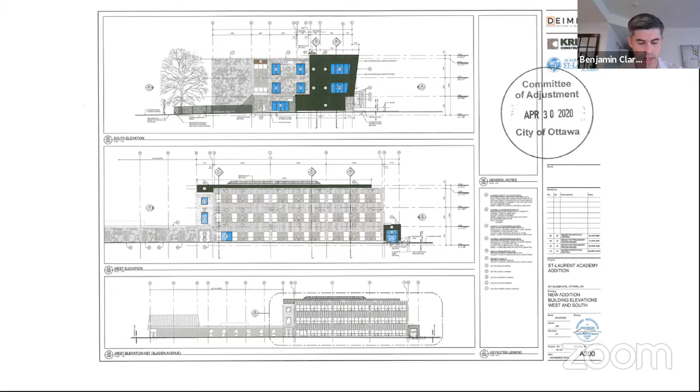In terms of the variances, I've grouped them into two categories. Variances A, D, and E relate to the existing parking configuration and are triggered by way of site plan. In order to obtain site plan approvals, we need these variances. For some time, the school has relied on 640 Noranda Avenue to fulfill parking demands.

640 Noranda is very close. You can see on the plan it is to the southwest, and Forbes Park lies in between. Who owns the parking lot, just out of curiosity? The parking lot is owned by a numbered company, and the director of the school is a director of that numbered company, so it's jointly owned with the school at a high level.

Variance A will permit this required parking for 641 Sladen to be located off-site. It's required in order to legalize that relationship.

The next variance is D and E. So following severance approvals in 2011, which separated 641 Sladen from 638 Center Street, which is on the screen, is the blank property and behind to the east.

The front yard parking configuration of 641 Sladen was reworked, and that happened in the summer of 2012, so about 8 years ago. Is that done with permit?

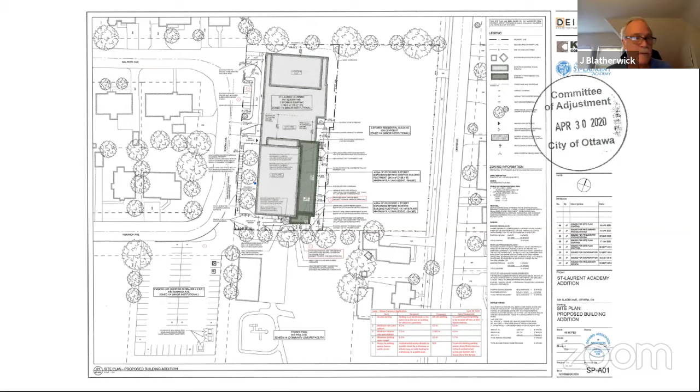Has that been successfully concluded? No, rights of way preferred that site plan approvals advance and that the variances are obtained, and that agreement would form part of site plan approvals.

I state within the plan that these three variances meet the four tests as part of the minor variance approvals. A note, I'm not clear on the address for 640 Noranda.

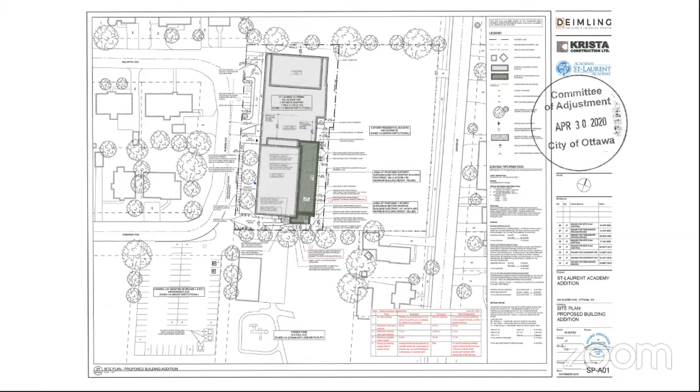In some instances, it's referred to as 640 Sladen. You're losing your audio, sir. Are you able to hear me now? That's a little better, yeah.

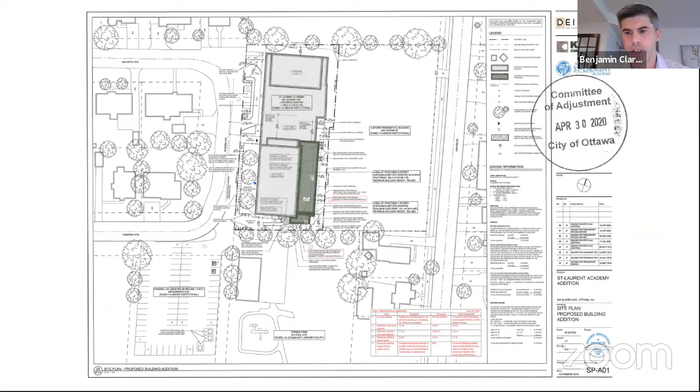So just mentioning that I'm not perfectly clear on the address for 640 Noranda. In some instances, it's referred to as 640 Sladen. So I would just ask that in the decision, if staff is able to confirm the legal or the municipal address. I believe it's 640 Noranda, but that should be clarified.

With respect to the proposed expansion, there are two variances that actually deal with the expansion, B and C. At a very high level, variance B seeks relief from the required rear yard setback of 4.5 meters. This variance represents relief of 0.3 meters, so about 1 foot.

I understand from the project architects that this variance is being pursued in order to ensure that the proposed pool will actually have a functional width. When compared with the requirements of the zoning bylaw, the 1 foot variance is not expected to introduce measurable impact on the lands to the east, upon which 638 Center, a retirement residence, is presently being constructed.

Variance C, which seeks 4.6 meters of relief from the required interior side yard setback of 7.5 meters, is to permit a relatively small 44 square meter, 1-story vestibule, an entrance vestibule within the side yard. Especially when considering the mass of the school behind the vestibule, it's not anticipated that this change is going to cause undue adverse impact. Through the site plan process, the interior side yard is being made functional from a design standpoint and a civil engineering standpoint.

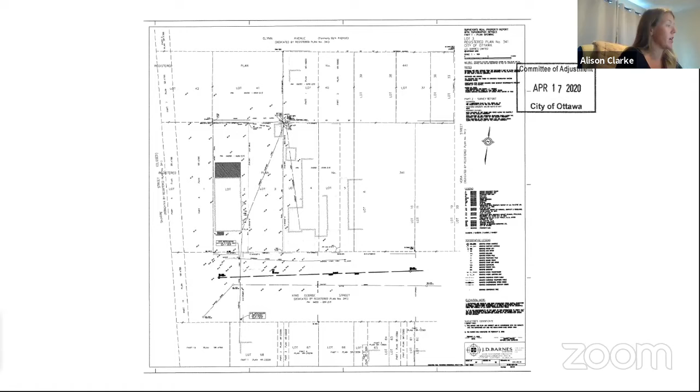We would echo the comments provided to us from the planning department in support of this application. The lot fabric of the street is comprised of single and semi-detached dwellings. Several single detached dwellings on the street are of similar lot width and area as to that we are proposing at 71 King George. Although the zoning bylaw requires a front yard setback of 6 meters, the setbacks of the dwellings abutting 71 King George, both beside and across the street, are less than 6 meters as well. You'll see from the plans that we're proposing just less than 4 meters.

Despite the reduced rear yard setback we are requesting, the proposal will provide the required rear area, thus providing an adequate yard. Similarly, the reduced side yard setback will cause minimal impact, given that the side yard will maintain its functionality, and the easterly side yard will provide access to the rear yard for maintenance. Again, many homes on the street, both beside us and across, provide a similar side yard to that which we are proposing. In summary, the proposal meets the intent of the R3M zone today and matches the fabric of the street. We welcome any questions that you may have.

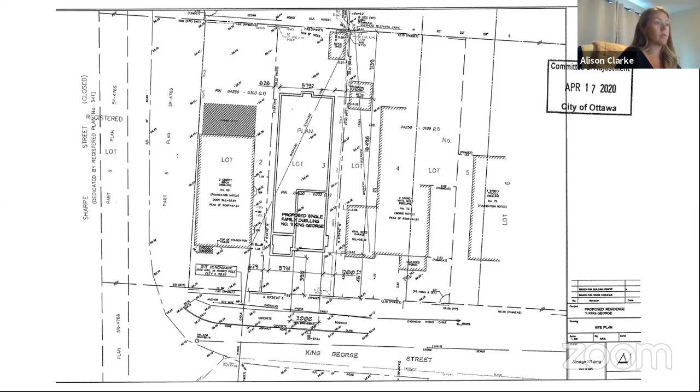Mr. Wilder, you have a question.

I appreciate that these are very small, deep lots on the street. Can you refresh my memory on the history of this lot - was it demolished, or was it actually attached to the adjacent property and severed? That's my first question. Secondly, your request to build to 8.5 meters rather than 8 meters, I don't really see a need for that. You can certainly dig a slightly deeper foundation. I've looked at the other homes on the street, and I don't see any need for variance C.

With regards to the history of the lot, when we received this project from the owners of the property, we were made aware that it was a vacant lot. It has been a lot on this plan 341 for a number of years. There is no severance application that we could find.

With regards to your question about height, the latest elevations provided to committee members show the height is 7.6 meters right now to the midpoint of the roof. This request for height was done out of an abundance of caution. We've gone down this road before where, by the time we get to building permit stage, depending on the grade of the land, the height ends up being a little bit higher, and in the past we've had to come back for a 0.1 meter height request. I agree we are at 7.6 meters and the bylaw allows 8. I'm sure we will be under it, it's just because we had a bad situation in the past.

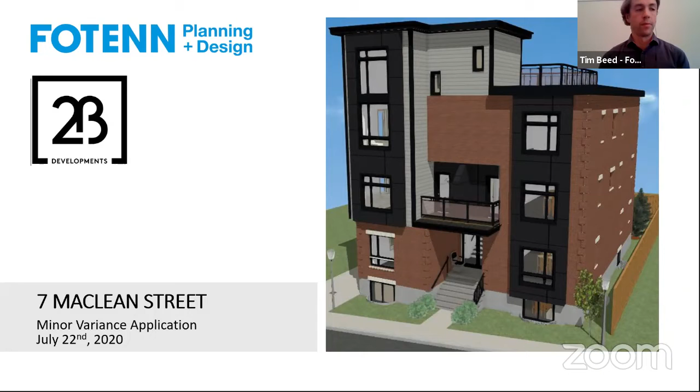The subject property is an interior lot consisting of 386 square meters, with 15.6 meters of frontage along Maclean, and a lot depth of 24.7 meters. It is currently occupied by a single detached dwelling and an accessory building, which is proposed to be demolished.

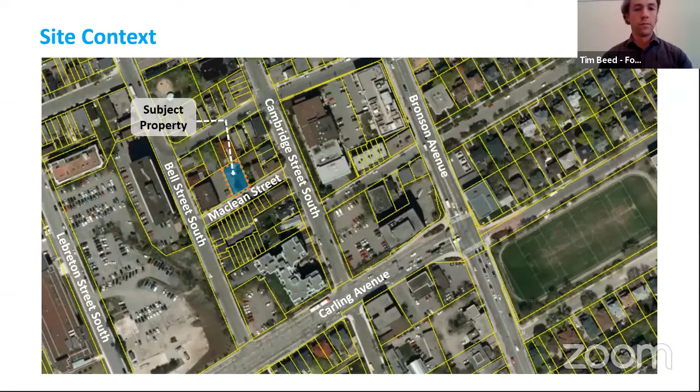The zoning on the site is R4T, subzone T, in the Ottawa zoning bylaw. The intent of the residential fourth density zone is to accommodate predominantly low-rise residential built form, such as this proposal, with a maximum height generally up to 4 stories in the general urban area.

The subject property is within the general urban area on the official plan, and similar to the R4T zone, the city permits and encourages a wide range of choices of building typologies and a maximum of 4 stories.

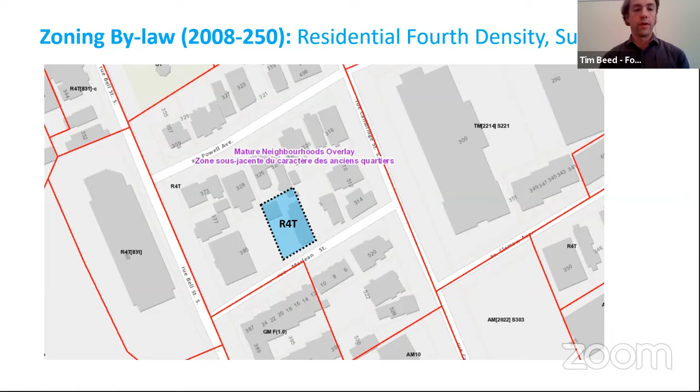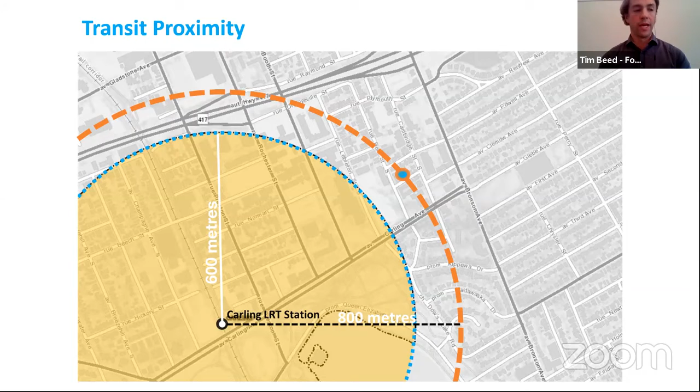The subject property is currently well served by various mobility and transportation options. It's within 800 meters of the Carling LRT station, which will be part of the Phase 2 Trillium Line extension, and is also well served by existing car share options within close proximity in the community.

The community context in terms of uses and built form is quite variable. The subject property is noted on this aerial image as number 1. Numbers up to 7, with the blue outlines, indicate the various residential and institutional built forms within the immediate context, ranging in heights and massing from 3 to 7 stories, with 3 and 4 story multi-unit apartment buildings located along Maclean, directly west, and also close by at the end of the street in a 4-story multi-unit building. There are also multiple parks, community amenities, employment opportunities, and spaces within the immediate context of the community.

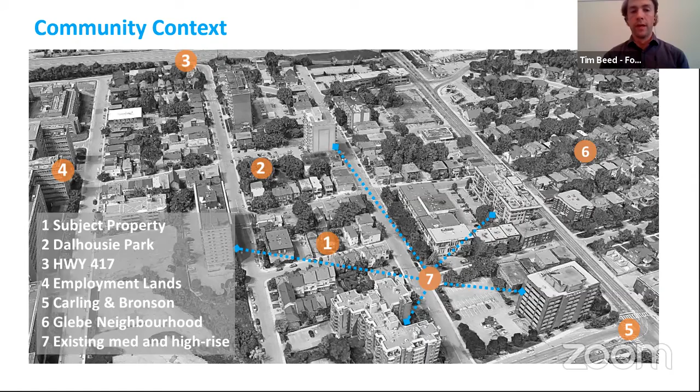The character of the street is currently quite variable. The subject property is currently a 2-story single detached home with driveway and parking accessed from Maclean Street. Directly west is the 4-story multi-unit referenced previously. The portion of that property to the west that abuts the subject property is a surface parking lot; you can see the brick wall that indicates the parking lot and screening to the subject property.

Along Maclean and in close proximity are various 3-story townhouse buildings, with varied and different types of front yard and parking accesses.

This slide better illustrates the existing condition to the west with the surface parking lot, and the existing condition to the east with a fairly large landscaped buffer between the subject property and its immediate neighbor.

Next slide, please. And again, this is to illustrate the varied built form within the area.

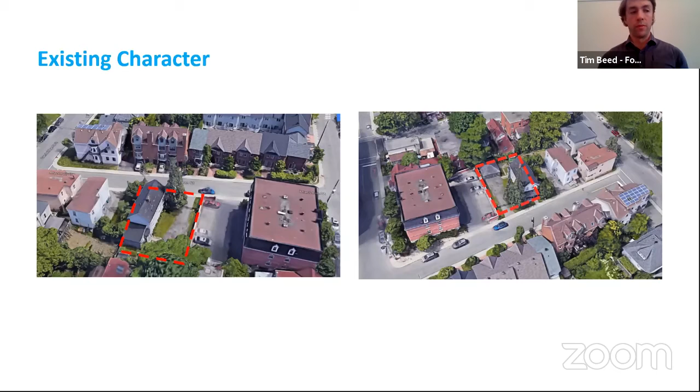So the proposed development is a 4-story building—3-story with an atrium and rooftop access point. We're classifying it as 4-story, 13.2 meter building with 7 units, building footprint of 161 square meters. It contains a mix of bachelor, 2 and 3 bedroom units, and has been designed specifically to respect and complement the community, reflect the lot fabric and surrounding area, and respect the lot area and size.

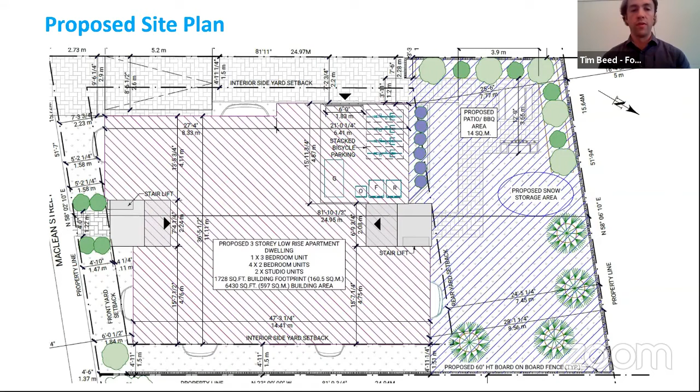Aside from the building height which measures at 13.2 meters, aside from the rooftop access, which we can see on the next slide—the building, for the majority of the built form, massing measures at 10.6 meters, which is significantly below the permitted maximum height within this zone of 14 meters.

Other than that, all zoning provisions, aside from the two that have been requested, have been adhered to, including height, setbacks, side property lines from the roof structure to the building face, landscaped area, amenity area, bicycle parking. They're all met or exceeded.

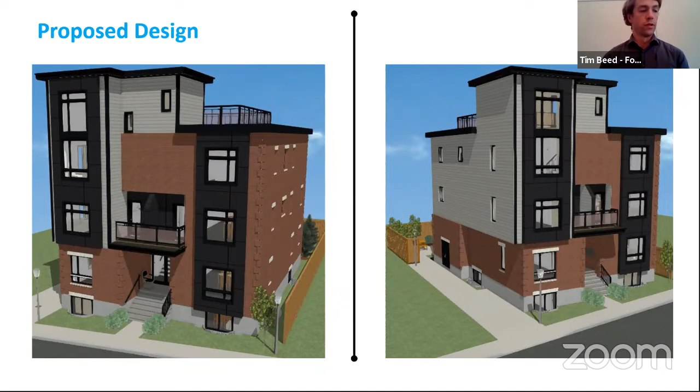And the building also provides a substantial communal rear yard amenity space. We can go to the next slide—you can see here, 14 square meters with patio, barbecue, substantial landscaping, which was a direct outcome of communication with residents and nearby neighbors to provide more of a privacy screen from the rear yard area.

In terms of facade and materiality, the choices include brick, masonry, dark paneling on the front facade, a selection of cladding and colors to provide visual amenity as well as respect to the existing materiality within the community and the character. You can see here there's an access door along the western side, which provides access to enclosed bicycle parking, of which 6 have been provided, as well as garbage, refuse, and collection.

Any vehicle parking on the site? There's one vehicle parking, a visitor parking space provided in the location of the existing driveway and vehicle parking area. It's in the interior side yard to the west. You can see it on this rendering—it's slightly extended and leads into the walkway that goes back to the garbage enclosure and bicycle parking.

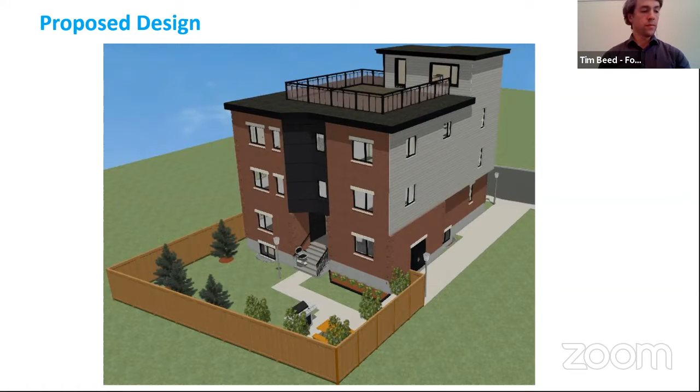Right. Moving on to the next slide. So the last item that I'll discuss, and then we can just quickly go through the remaining elevations.

The rooftop patio is accessed from the 4th story portion of the building, which is in a sense more of a mezzanine, providing access to the rooftop patio, which adheres to the zoning bylaw provisions in terms of setback and screening from the building edge and therefore the surrounding community, ensuring adequate distancing there.

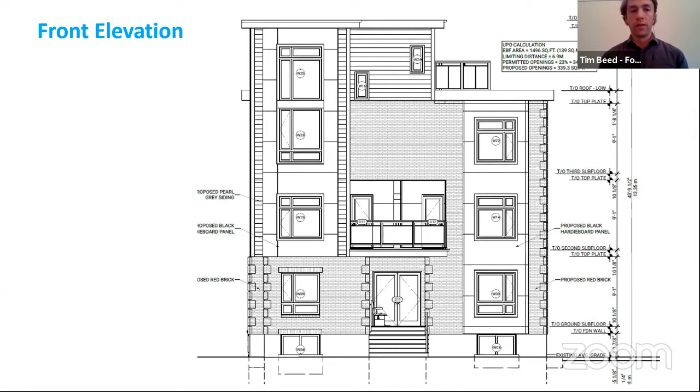We'll just go through the elevations, so if you don't mind, showcasing the materiality and the building step back in height from 13 to 10.6. The building also, as you can see on the front and rear entrance, has lifts for accessibility features. It has fenestration window patterns that provide eyes on the street and a positive interface with MacLean.

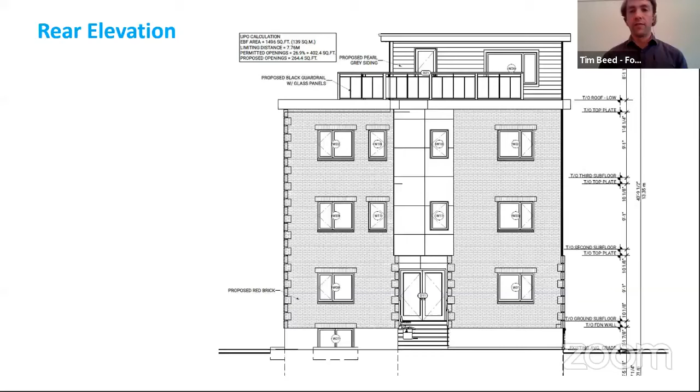Go to the next slide, please. And here's the west side elevation as well, showcasing the access door at ground level to the bicycle parking and garbage collection and storage.

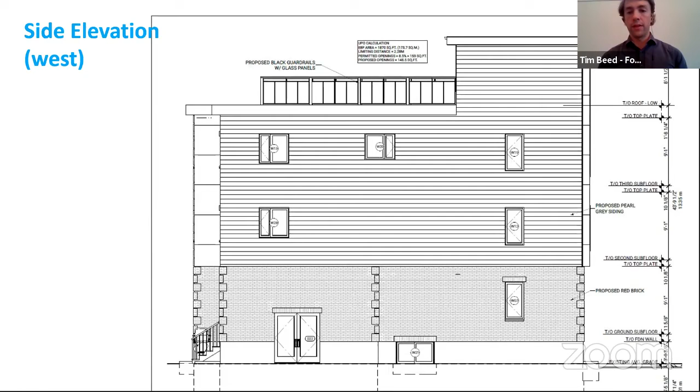Next slide, please. This is the rooftop plan with access to the rooftop patio, which I should mention will be provided solely for the residents of the 3rd floor. It will not be communal space, but accessed only by those residents in the top floor unit.

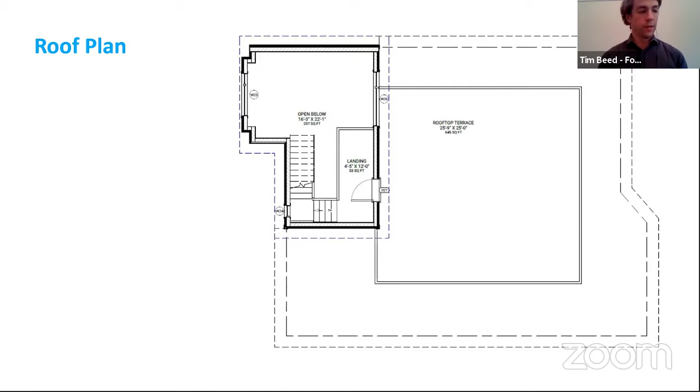Next slide, please. So I'll just go over quickly how the proposal adheres to the 4 tests of the minor variance. The general intent and purpose of the official plan is maintained. The proposed development conforms to the official plan policies, including policies which permit low-rise development up to 4 stories. It's an infill and compact development that's respectful of the community character and provides transitions to the immediately abutting residential properties. It also adheres to the urban design and compatibility criteria of sections 2.5.1 and 4.11.

Including massing and height, it's considered appropriate and compatible given the size of the site, the existing built form within the immediate area, and the design. The general intent of the zoning bylaw is also maintained. As mentioned, regarding the size of the building footprint on the lot, although a minor variance is required for decrease in minimum lot size and increase in walkway, the building is still able to maintain 57% lot area for landscaping, a larger than required rear yard at 125.5 square meters, and exceeds all building setback and amenity area requirements.

The building height, as mentioned, is significantly lower than for the majority of the building, especially on those sensitive interfaces to the rear and eastern side yard, significantly lower than required or permitted, providing for adequate transition and mitigating any possible negative impacts that may occur from shadowing, noise, or overlook.

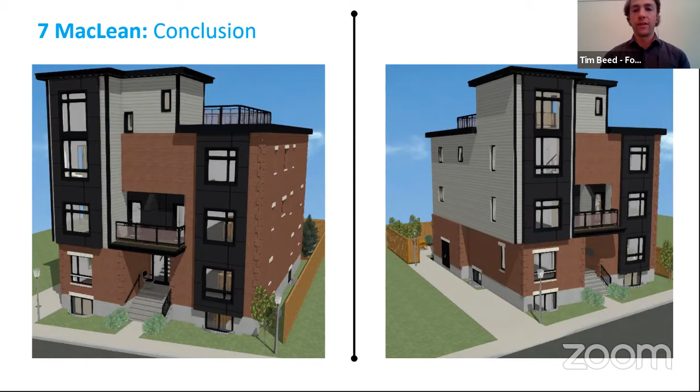The building has been designed to respect the lot size, specifically designed. In terms of the walkway width, the purpose of the provision is to minimize the amount of hard landscaping. This street has very variable front yard conditions with significant hard landscaping, significant walkways, and parking in areas, so we don't believe the minor increase in walkway width will have any negative effect on the character. The variance is minor, a 14% reduction in lot size.

It will likely not be noticeable in the building, as we've mentioned, and can still provide the required amenity space and landscaping area, mitigating any undue adverse impacts on the community or the residents.

The variance is desirable for the appropriate development of the property. It provides additional housing opportunities within the community. It's well designed, low rise, respectful and complementary design that is in keeping with the existing character and the future and planned function of the area. It's also considered an important investment as Ottawa intensifies, especially in close proximity to LRT, in something often referenced as the missing middle — low-rise, walk-up style residential multi-units that can provide for a gentle or more modest density increase within our established communities.

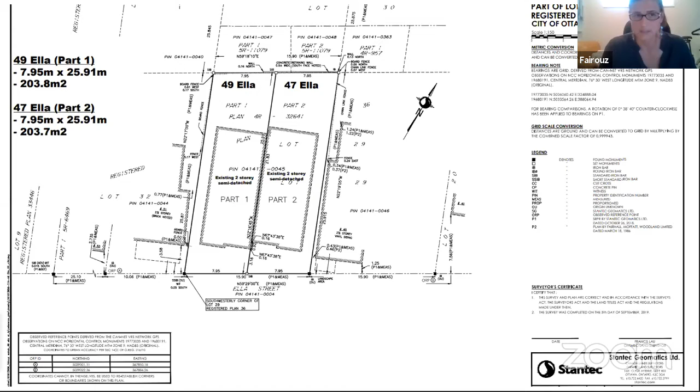Would you have an elevation of that front elevation? I do not have that with me, no, but I can take a photo and send it. Well, I think I'll accept your assurances that there's no structure underneath or above. Okay, thank you. No problem.

You're aware of the conditions, at the independent services and the zoning? Yes, I am. Frankly, I don't know why the department is asking for a noise study to be registered on title, perhaps they could respond, I'm a little confused. Mr. Chair, I believe it's not a noise study but a noise agreement, because the house is approximately 30 meters from Fifth Avenue, which is a collector road. So what is a noise agreement on title? Yes, effectively it's to warn future purchasers that there could be higher than normal noise due to the collector road at Fifth Avenue. Yeah, certainly not getting higher than normal noise on Ella Street, I'm familiar with Ella Street.

Okay, thanks very much. Are we all in favor of this consent as explained by the owner? Good luck, and I hope the bricks don't fall off your garage, you don't have to go back again. Thank you, I appreciate that. Thank you very much. You're welcome. Bye-bye.

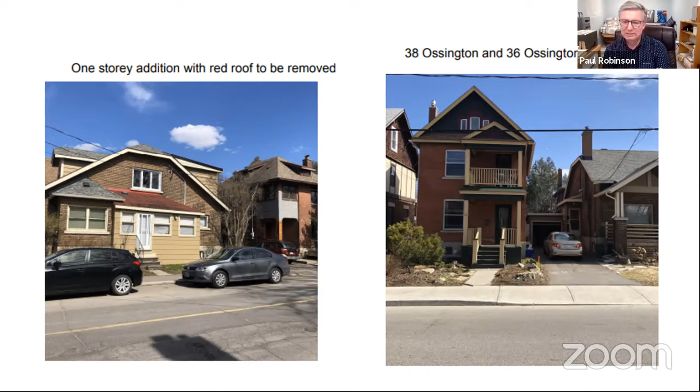This is the view along Grosvenor, and that is the area with the red roof that will be removed. The photo on the right is a view looking south along Grosvenor, and there is the house to the south with a driveway that is immediately abutting the rear yard of our client's property.

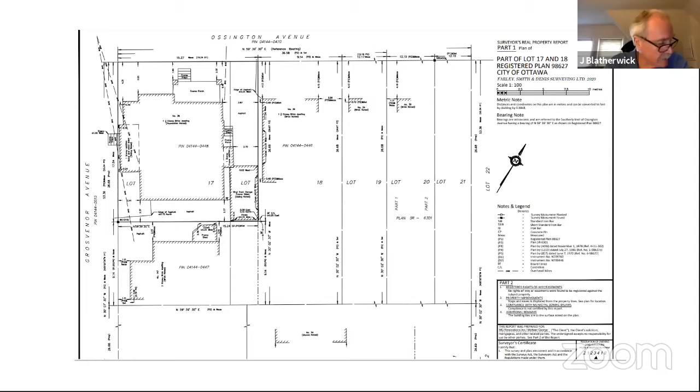There is also the intent near the bottom right of the survey plan where the garage is shown. There's a small area between the west wall of the garage and the east wall of the house that is an open area now, and the owners would like to fill that in from the rear wall of the house going towards Ossington. And I take it that's what triggers variance A, C, and E, correct? Correct. If you could explain those.

Variance A is for rear yard setback. The normal rear yard setback in a corner lot abutting an interior side yard is 1.2 meters. The garage itself is 0.14 meters from the rear lot line. The remainder of the house is, I believe, 2.37 meters from the rear lot line, so that's not the issue—it's the garage, which is 0.14 meters.

The lot area requirement in this area is 270 square meters. This is an existing lot; it's 267.8 square meters. So that's variance B.

Variance C is for the garage. The normal setback is 1.2 meters. The garage itself is on the lot line, so that requires a variance. It's an existing condition. Variance D is for the front yard setback.

The front yard setback is to match the setback of the building immediately adjacent to the east, and that's 4.12 meters. The existing ground floor of the building is 3.53 meters back, and we're intending to have the second floor also at 3.53 meters. So that is the reason for variance D.

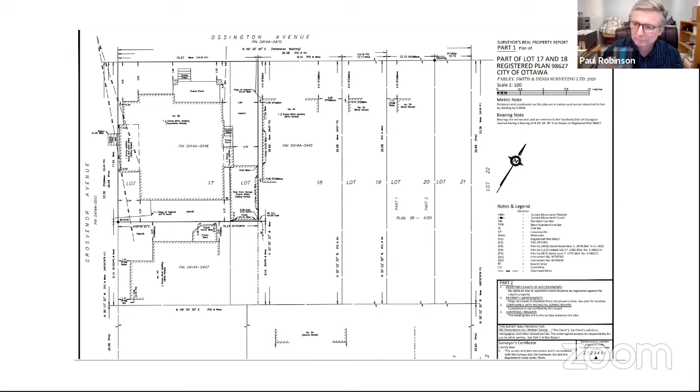Okay, all right. Thank you, Mr. Robinson. Ms. McLean, I believe you had some direction for the applicant regarding variances A, C, and E.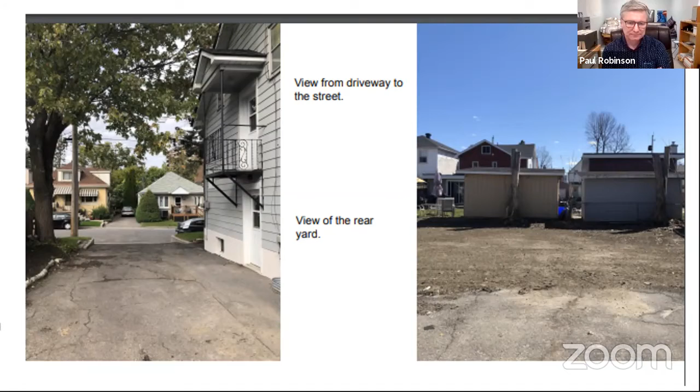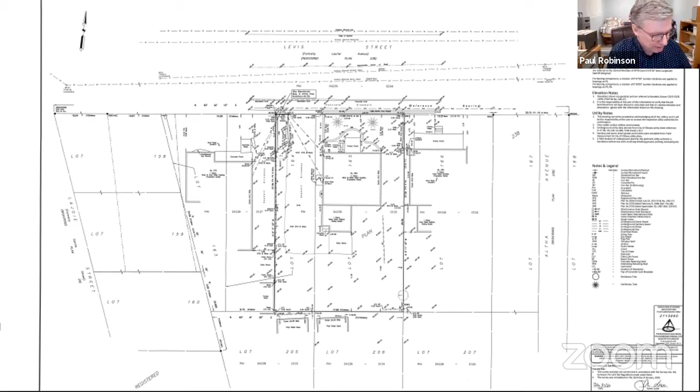So you can see the existing single family home on the property. You can also see some of the lot fabric in the area. The property is 17.68 meters in width. We are proposing - it has, if you go to the site plan, which I believe is the next slide. Next slide please, thank you.

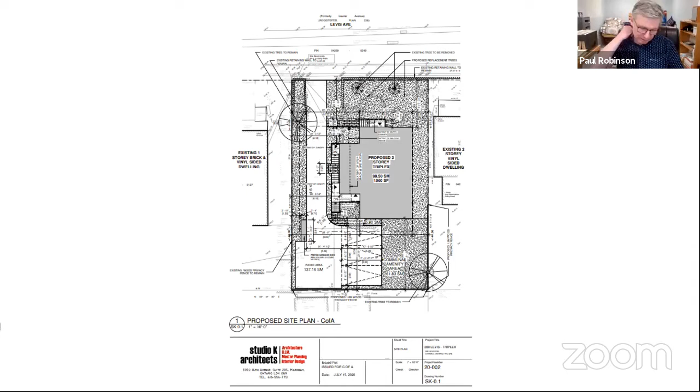The front yard setback requirement is 6 meters, we're providing 6.13. The rear yard setback is based on a percentage of lot depth; the required is 7.66 meters, we're providing 9.29. The side yard setback on the east side, which is the right-hand side of the diagram, the requirement is 1.5 meters, we're providing 2.05. On the west side, it's also 1.5, we're providing 6.18. We're providing 3 parking spaces.

The maximum building height is 11 meters, we're providing 10.75. We have staff support for this, and other than the required lot width and lot area, all the other performance standards are met.

The owner has discussed the application with the immediate neighbors on either side and the neighbors across the road. He's also been in discussions and email dialogue with the neighbor at the rear, who is agreeable.

There would be a 1.8 meter high wood privacy fence along that shared rear lot line, which would also extend along the east side to line up with the rear of the building to the east. Along the west side, there's already existing fencing. I provided these drawings to the community association representative, and they seem to be fine with it.

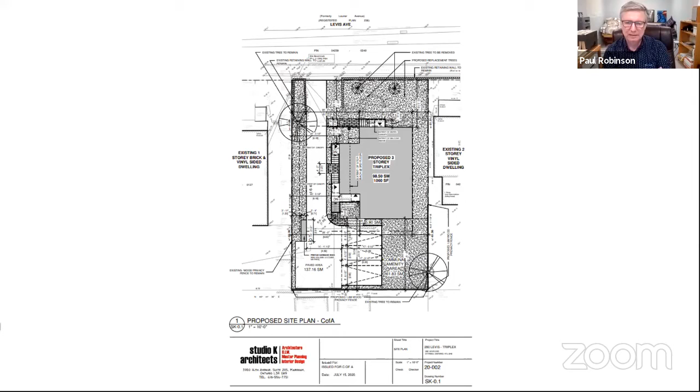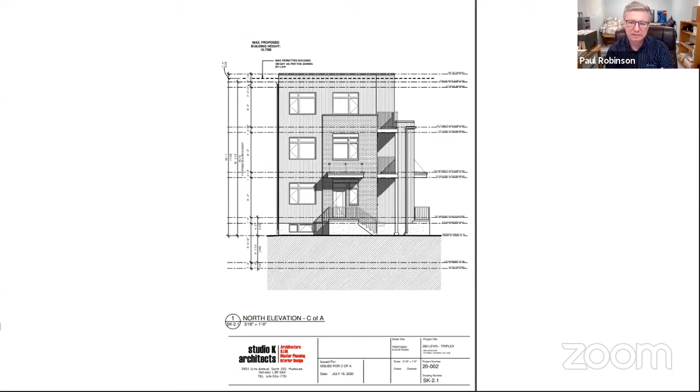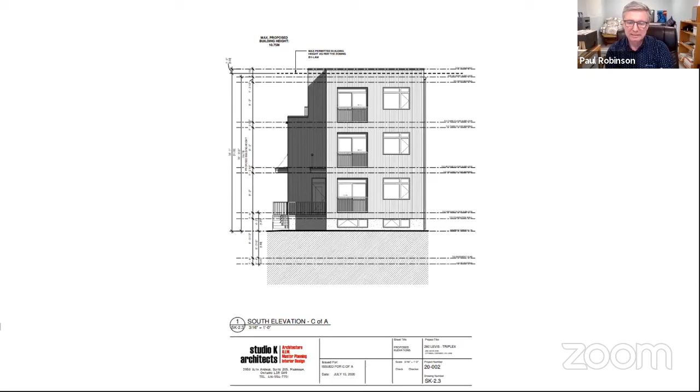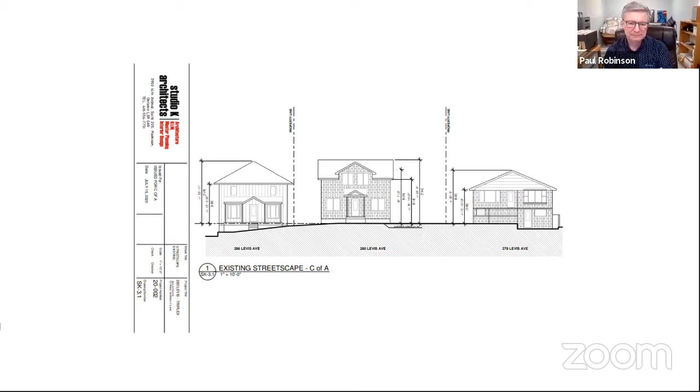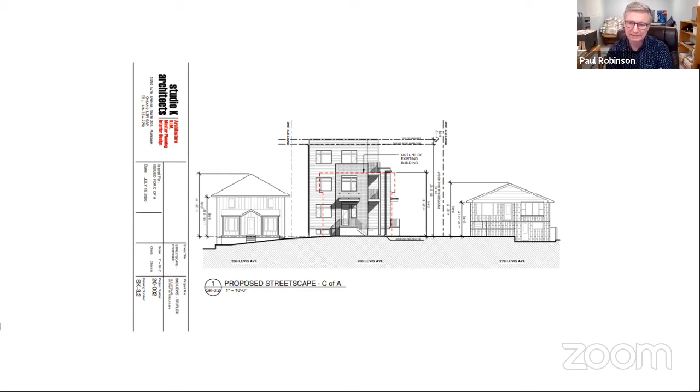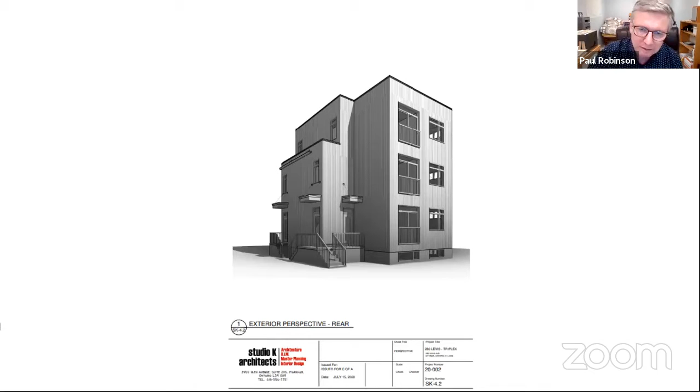This is the block and the surrounding area in terms of their existing lot widths and lot areas. The subject property is 17.7 meters wide, and the requirement is 18 meters for a triplex. In this area, a single family home needs to be on a 15-meter wide lot, and as you can see, there's a range of widths.

Many of them are 12.2 meters, or 40 feet, for singles and duplexes. The duplex next to it is only 13.9 meters. There's a triplex on the corner that's only 12.2 meters and 336 square meters. There's a fourplex behind that that's the same size. This indicates that this lot is the widest, and I believe the largest, lot in the area.

We're just asking for a small variance on lot width and a relatively small variance on lot area, while meeting the rest of the performance standards.

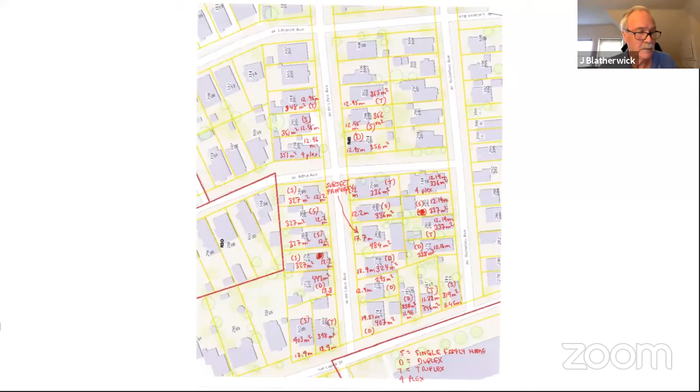So in your estimation, Mr. Robinson, the triplex is not out of place in this part of the neighborhood, given the mix of housing within a block of the subject site? That is correct. There seemed to be, quite frankly, a predominance of triplexes and duplexes and a lot less singles.

Okay, and your only requests for relief are lot width and area — all the other performance standards are met. Correct. Okay, do any of the members have any questions for Mr. Robinson before we move on to the public delegations?

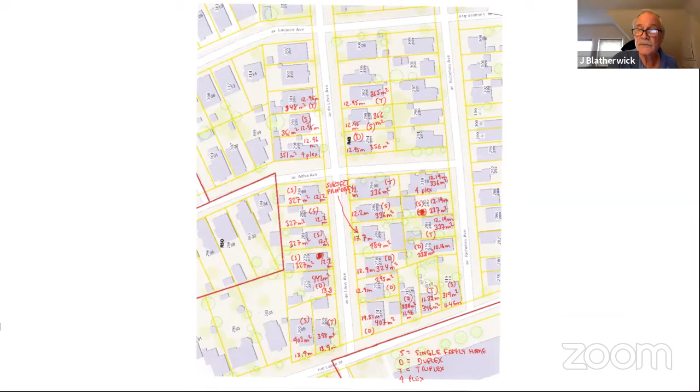No? Okay. None, Mr. Chair, but I just would note we've lost a member here for the committee. Doesn't affect quorum, but we have lost a member. Where is Mr. Wilder?

Oh, we'll have to move on. We have at least one owner, or one neighbor, that wishes to speak to this. Mr. Egan, are you there?

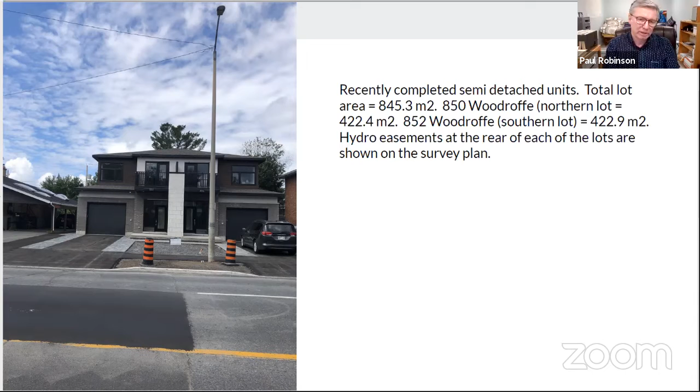This is a photo of the property now. You can see the notification sign in the front. It's on the west side of Woodroffe between Carling and Highway 417. Semis that were built and have occupancy permits. There were no minor variances required for these semis.

This is the survey plan. Part 1 and 2 on this survey plan are for the northerly semi, and part 3 and 4 are for the southerly semi. Parts 2 and 4 are easements in favor of Hydro Ottawa.

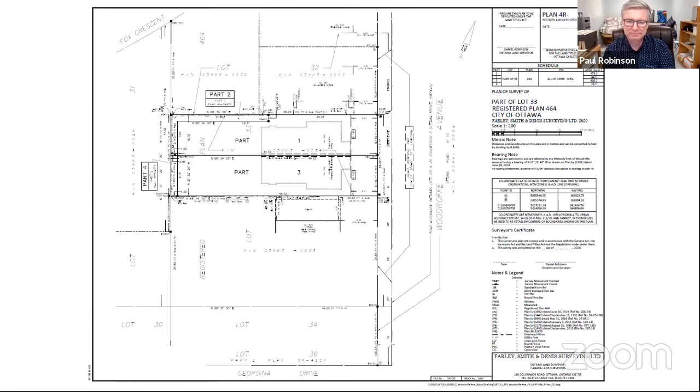I don't think there's any more pages. You're aware of the conditions? Yes. Fire separation from building code services, a certification re the party wall. Yes. Independent services, a joint use and maintenance agreement, and a noise agreement. Yes, that's to be registered on title.

All right. Any members have any comments, questions? All in favor of granting this consent? Your consent is approved, Mr. Robinson. Thank you.

Oh, one more time. All right. There's 2 more. There's this and one more.

We're not going to deal with 2215 Plesser.

So, do you solemnly swear or affirm that the notice provided to you as part of the application process and by the committee was posted at the property to which the application applies for the prescribed number of days before the hearing and clearly visible and legible during the entirety of that time? I do. And the application for Plesser is a minor variance to permit a reduced total side yard setback and to allow front yard parking for the construction of a new 2-story semi-detached dwelling.

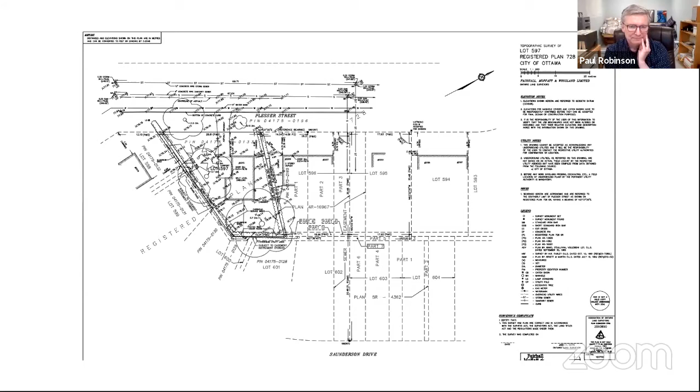We're proposing 2 single car driveways for this property. There is a city tree of 50 centimeters in diameter on the south side of the property that is to remain. There is, I think, a 15 centimeter diameter tree where the proposed driveway is, and they're proposing to relocate that. Then there is a tree which we have agreement from Forestry Services to remove upon a building permit. That is where the southerly semi is, and there's also a tree in the rear yard of the northerly semi that we have indication from Forestry Services they would approve for removal upon a building permit.

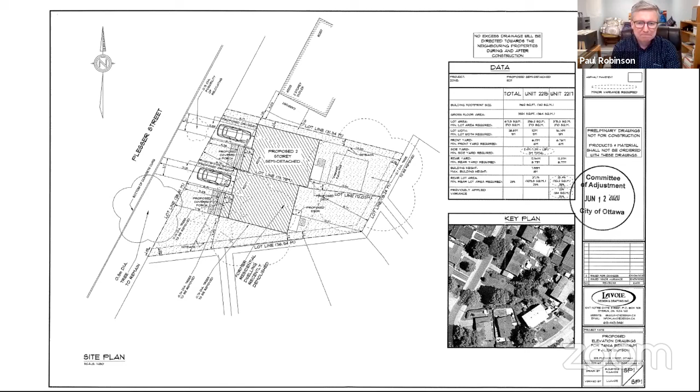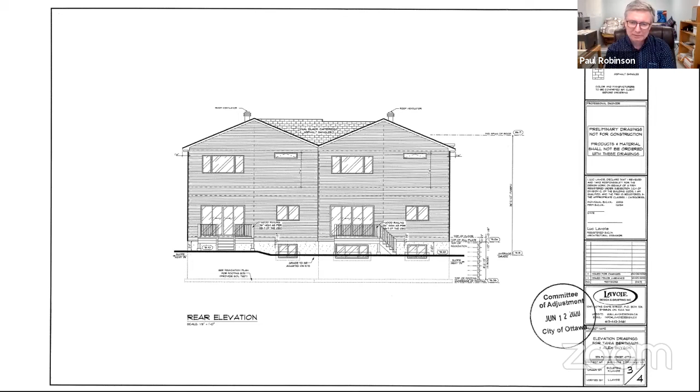Rear elevation. These units are very similar to one another. Next, please. The right elevation. And this is the front elevation. So the existing semi to the east is shown on the left with its carport, a 1.2 meter setback to the lot line, a driveway in the front yard, and I believe it's only 4 steps to the front door under this option, which would not have the reverse drainage slope.

There is a note, if you look on the right-hand side of the semi, it says top of foundation, and everything above that has been built. It's waiting to come to this property once the foundations are dug, and it would be placed - it's a prefab home. So the construction timeline, once the foundations are poured, is quite short with a prefab home like this.

Next, please. Oh, sorry, that's the drawings.

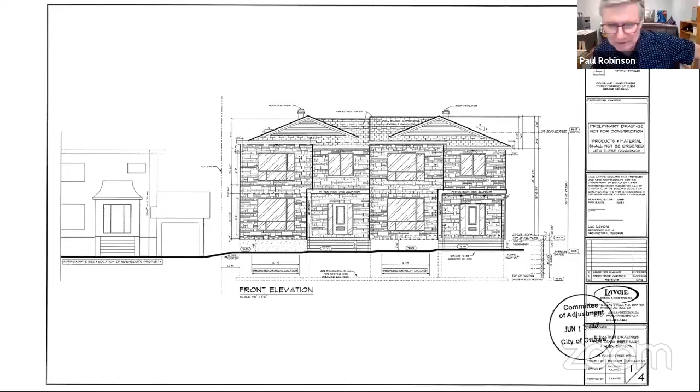I did have a conversation on the phone, and I emailed the neighbor immediately to the east, and talked to that neighbor about the application and the variances. She didn't have any issues with the idea of front yard parking. She had a few questions about what the setbacks were going to be from her carport to the lot line, from the carport to the house, and from her house to this new house. That was the extent of her questions with me.

The department has some concerns with the parking configuration.

Yes, Mr. Chair. As indicated in the report, the department has no concerns with the reduced side yard setback, noting that it's only a portion of it that will be reduced and it will still maintain functionality. However, per the zoning bylaw, front yard parking has been prohibited since around 1964. In this area, although we recognize that parking is required as per section 101, section 109 says parking should not be provided in a required front yard. Although Mr. Robinson indicated there are some houses that appear to have front yard parking, those parking spaces have not been looked at to see whether they have legal non-conforming rights, and some of them appear to be in the city right-of-way.

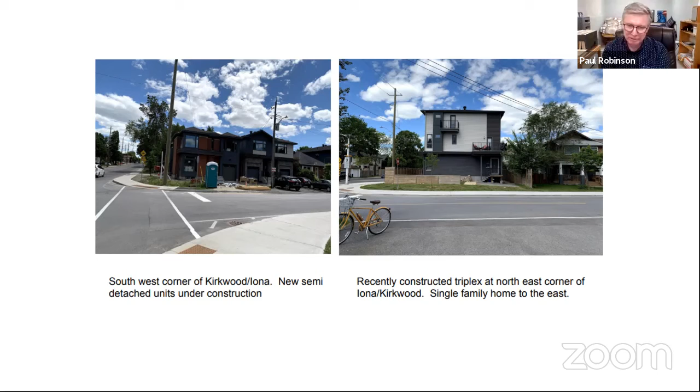These are semis being built on the southwest corner of Kirkwood and Iona. I believe they've been before your committee in the past. On the right is a photo of a triplex that exists right now on the northeast corner of Iona and Kirkwood, and then there's a single family home to the east. Next, please. The subject property is on the right.

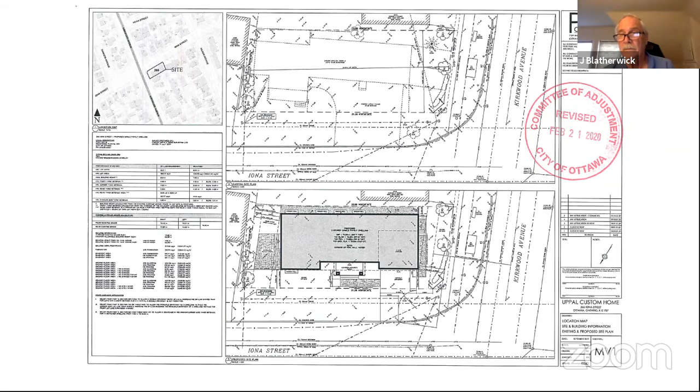So the objections that we have here from the past have been cleared? That is correct. Okay, because there was one for height variance, and then two for height variance actually, and you're now within the bylaw. Correct.

And one individual complained that the variances were unreasonable and excessively out of character. Was that when it was a height variance as well? No, not for that particular individual. Oh, okay.

All right. Does the owner wish to speak to this as well, or? I guess Mr. Uppal's not online. All right, so any of the members have any comments or concerns regarding this application? Are we prepared to grant this application as presented?

All in favor? All right. Good luck with your project, Mr. Robinson. Thank you, and have a good afternoon. Thank you, it's the last time you have to swear an oath with you. Yes, thanks, have a good day. Bye-bye. All right, thank you. Bye, see you.

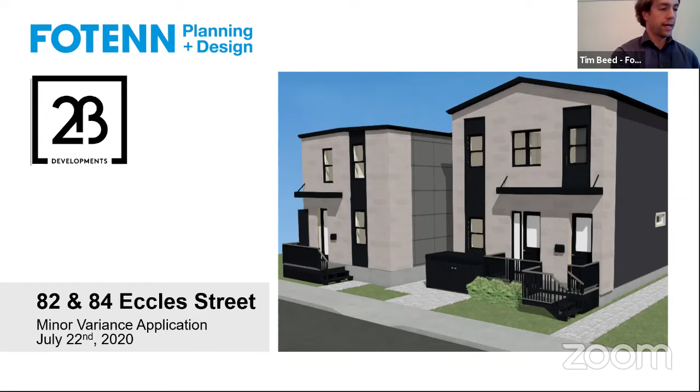The property owner and management team had previously received permits for the construction of the residential building on the vacant portion of the lands. As per the historic imagery that was accessed through Geo Ottawa, the vacant portions of the lands known most municipally as 84 Eccles have been vacant as far as we can tell since at least 1928.

Due to a design change when 2B Developments became involved in the project, an application for minor variance became required to facilitate the new intent for the building and the lot, and was submitted to the Committee of Adjustment. It was adjourned, similar to the previous application I was speaking to, so that the site plan control process could occur to receive technical feedback from planning staff, to ensure that when we were ready to come back to Committee of Adjustment, the building was in its final design and layout, which is the case now.

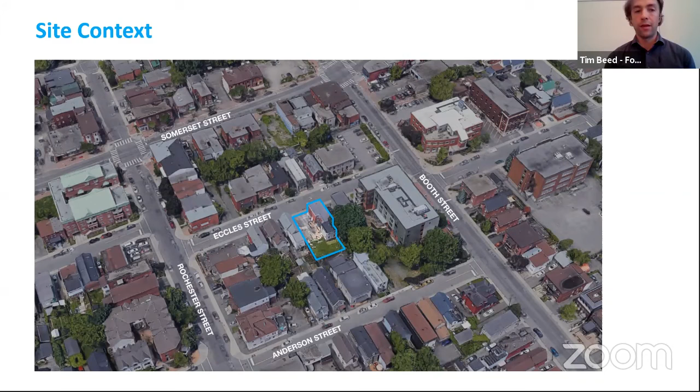In terms of public consultation, the mandatory pre-app consultation meeting with the community and municipal staff has occurred. It was in August 2019, and since then there have been ongoing communications between the management team, the residents, and the community association. We'll move on to the next slide, please.

The lot is currently zoned R4H, subzone H. Again, the intent of the fourth density residential zone is to accommodate predominantly low-rise development that's compatible with the existing community in the general urban area. Next slide, please.

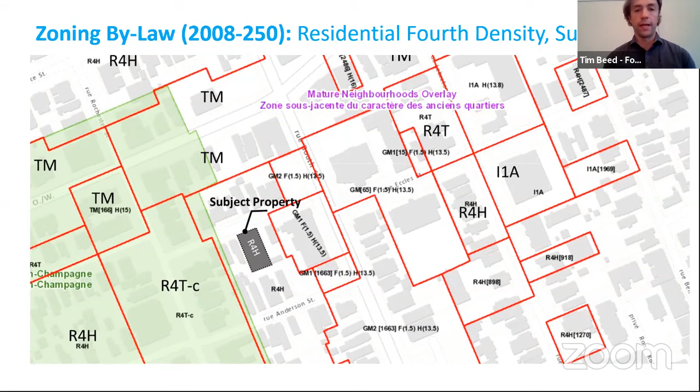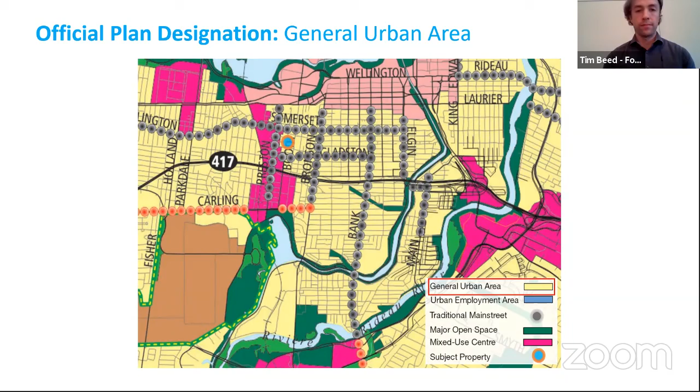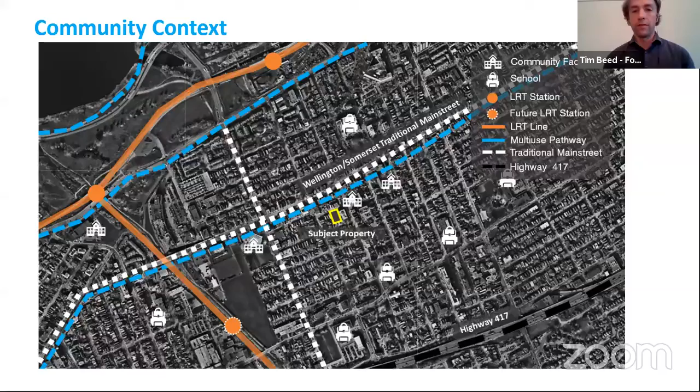The subject property is well situated within an established urban area in Ottawa. It's in close proximity to the Somerset and Preston traditional Main Street, and it is well served by existing community parks, recreational facilities, and schools, as well as active transportation infrastructure. Next slide, please.

The site is also well served by the current and future rapid transit infrastructure. It is within approximately 600 meters of Pimisi Station, as well as the future or existing Gladstone station, which is subject to upgrades for the Trillium Line extension.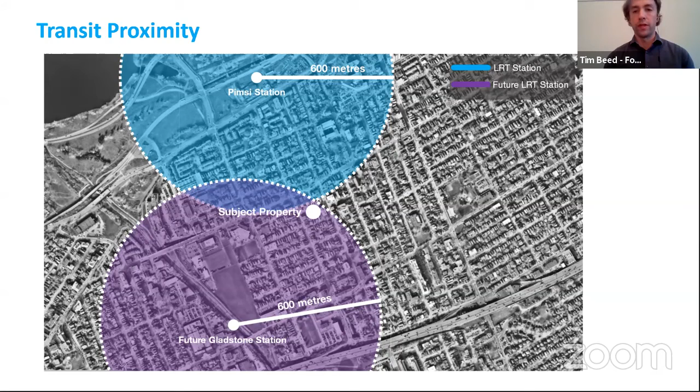Just talking about the existing character, the existing character of the community is quite varied, with multiple building typologies, lot sizes, and lot fabrics represented.

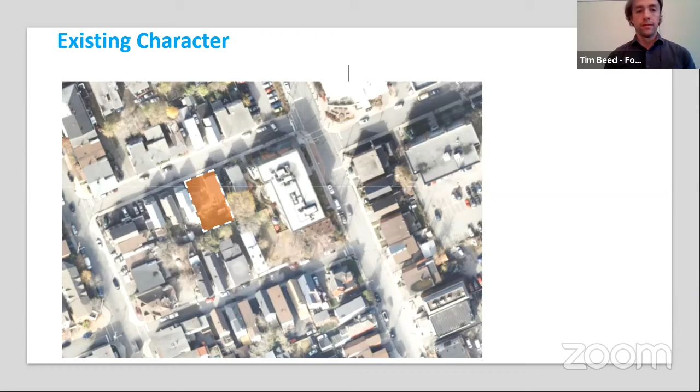Along Eccles, the predominant building typology is low-rise, 1 and 2 stories predominantly, with some multi-unit, some duplex, some triplex, and some single detached homes.

In terms of the proposal, I'll give a brief summary and then discuss how it adheres to the 4 tests of a minor variance. The building is proposed as a low-rise 6-unit apartment building with a height of 7.8 meters, which is less than the permitted height. The landscaped area is 40% of the lot.

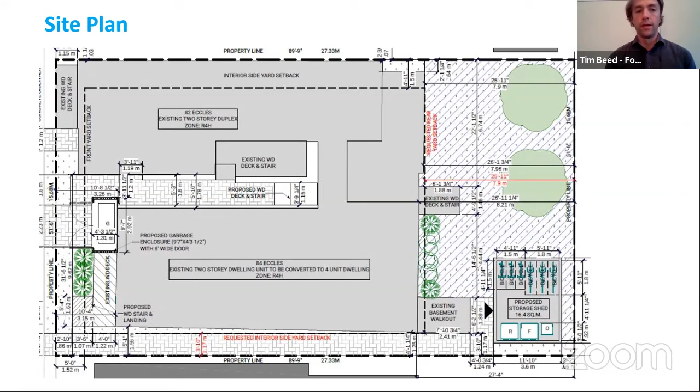There have been design decisions to include masonry facades, contemporary windows and details to enhance the building's presence and provide an updated aesthetic. The buildings will provide 5 entrances, so most units will have individual and independent private entrances from the outdoors.

The entrances to 2 of the upper floor units will be accessed via internal stairway. Bicycle storage, as mentioned, is located in the rear in an enclosed facility. Accessory building and garbage are to be stored in the low-profile enclosure to the front of the site.

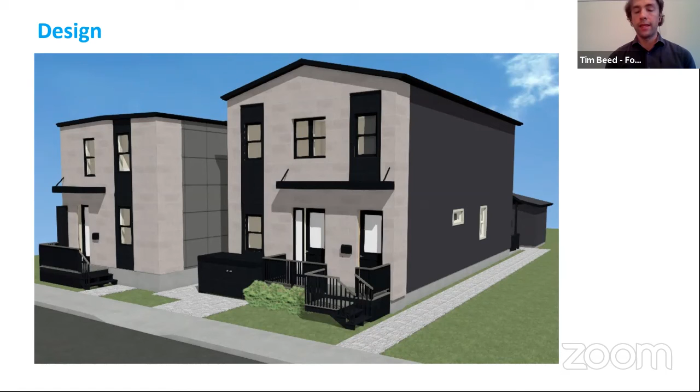Previously, the site contained a low amount to no vegetation. The landscape program provides an increase in that with hedging and sodding to the front, as well as hardscaping, and new trees provided in the rear yard.

And I take it there's no parking on this site? There's no parking provided or required on this site. Here's a rendering showcasing the condition for the rear yard with the accessory building and the provided new trees.

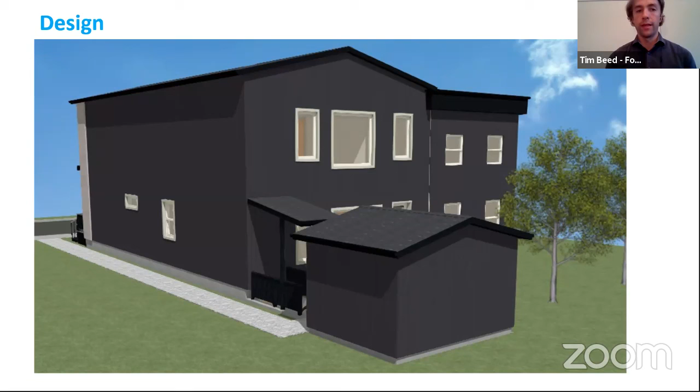The elevations showcase the distinct massing and separation of the 2 wings of the building, which we believe helps to reflect and respect the existing character and break up that street face, providing a more complementary urban fabric and urban rhythm to the street.

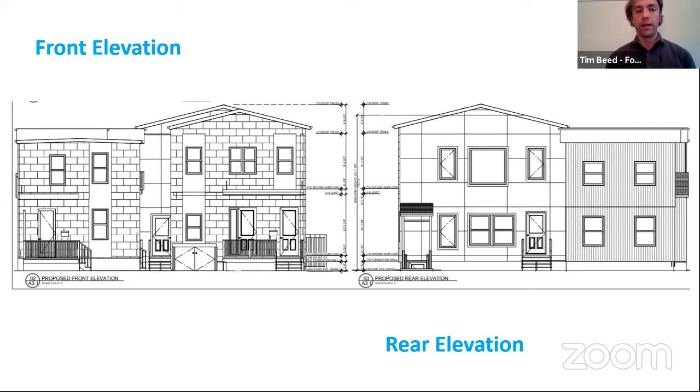The side elevation to the west, which relates to one of the minor variances requested, has been designed specifically to decrease any perceived impacts on privacy or overlook, with minimal window placements on that facade.

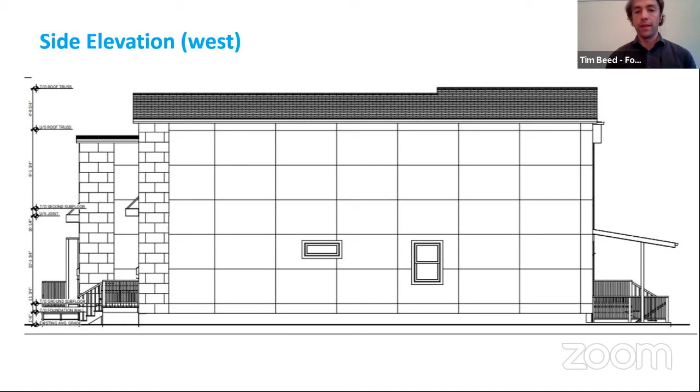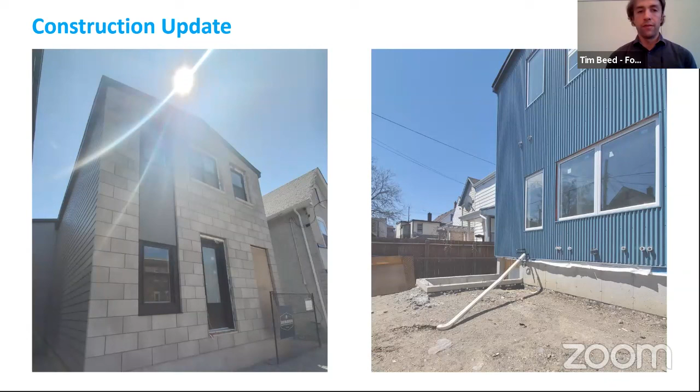So I'll speak to the four tests now. The first being the general intent and purpose of the official plan is maintained. The building conforms to official plan policies, including the policies of the general urban area, as it provides low-rise development permitted up to 4 stories. This is 2 stories, and it offers infill development, which is generally compact and compatible with the existing community.

It continues to foster that vibrant, diverse community with variable built forms. Due to its height, it is able to provide adequate transitions to the existing neighbors immediately abutting the property. And the building adheres to the design and compatibility criteria as discussed in sections 2.51 and 411 of the official plan.

The 2-story height, building orientation, and the proposed amenity space landscaping program provide for a compatible and appropriate condition. So although there's been a requested increase in units, those important zoning provisions have been maintained. And given the immediate street context contains building heights consistent with 2 stories, the proposed massing and height represents a sensitive, appropriate, and complementary design.

The second test is whether the minor variance meets the general intent and purpose of the zoning bylaw. The property is zoned residential fourth density in subzone H, which allows for low-rise residential development of this size and scale. There has been a minor variance submitted that relates to the footprint of the building in terms of setbacks. The building is able to maintain 40% of the lot area as landscaped, significant amenity area, and it exceeds other setbacks and performance standards. At 7.8 meters, the building height is significantly lower than the 11 meters permitted in the zone.

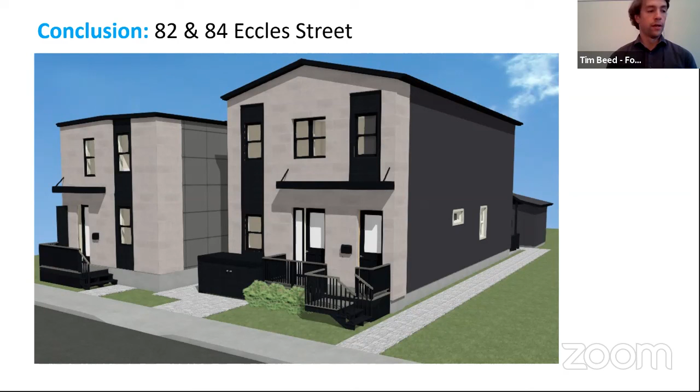The rear yard setback, although slightly deficient, has adequate area provided. And we feel that, given the front yard walkway and its increased width, the dominant character of the area is predominantly hardscaping, which was the existing condition on the site. We are providing an improvement to the hardscaping as well as soft landscaping to mitigate any concerns and soften that, providing a more positive interface.

We believe that the minor variances are desirable and appropriate. The building, as mentioned, reads as 2 separate buildings, and therefore helps to replicate and represent the existing built form. It provides additional housing that's sensitive to the community, and more options for residents to have different types of tenure and unit types. It's context sensitive - the increase in unit size is well represented by other zones within the immediate context, and the proposed mass and design are reflective of the existing condition along the street.

All right, so if you have any questions, I'd be happy to answer those now. Thank you, Mr. Beed. Are there any questions from the members of the committee?